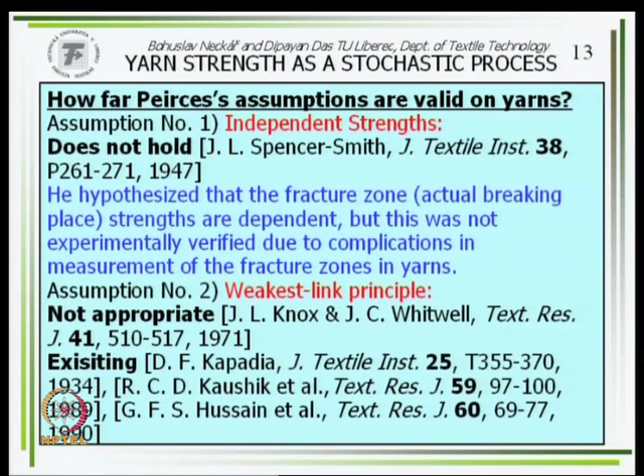Based on what is Peirce's differences? It is point one - point one means independent strengths. No, they are not independent. So it was necessary to create some more general model in which, among the short fiber portions, among the strands of short fiber portions, there was some dependency.

Let's imagine a yarn symbolically divided into some portions of length L0. The distance from here is 1 times L0, 2 times L0, 3 times L0, i minus 1 times L0, and so on.

Each portion, each segment, has its own strength S1, S2, S3. So we obtain some series of quantities S1, S2, S3, Sk, and so on.

What is the strength of some fiber length in which are the segments from the ith segment to i plus k? Let's imagine some length in which there are k plus 1 segments, from subscript i, to j equals 0, j equals 0 to j equals k.

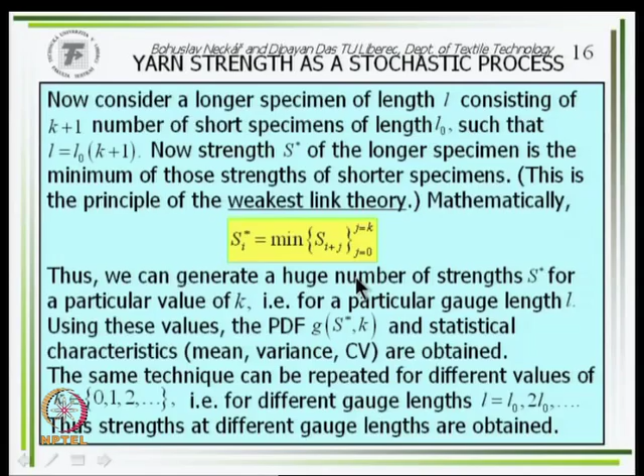The experimental work we did was as follows. The table illustrates experimental values. We had some instrument which helped us use a 5 centimeter gauge length, L0 equal 5 centimeters, and we measured strength.

Then we evaluated how the strength of longer lengths behaves, because we had this smaller measurement. We obtained this experimentally - immediately measured from different gauge lengths on the breaking machine.

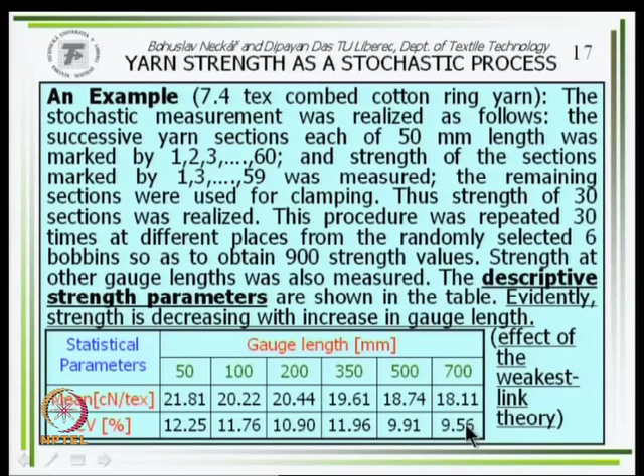You can see how is the distribution by 50 millimeter, by 500 and by 700 millimeter. It was same yarn, but different know-how for measurement: one time it was 5 centimeter gauge length, then 500, then 700. Can you see this histogram?

How is it going from the left-hand side? This histogram is recalculated to the standardized values. So you can see this linear transformation, it is going more to the left-hand side, in opposite to this Gaussian standard.

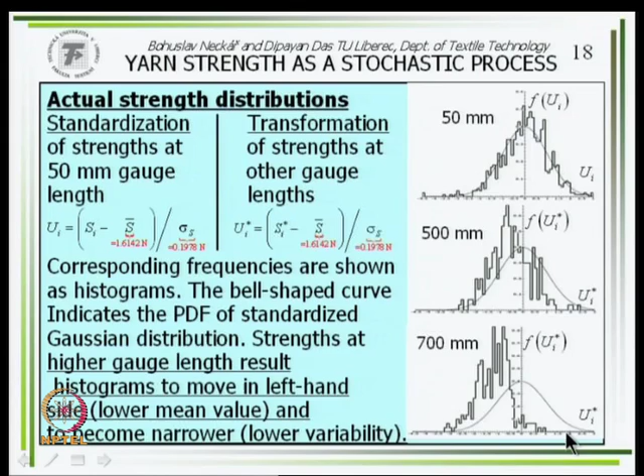Probability density function, Gauss - the idea of a Gaussian distribution in short lengths, in this case 5 centimeter lengths, is relatively good, as shown in this example. It is the same yarn, and a quantile plot.

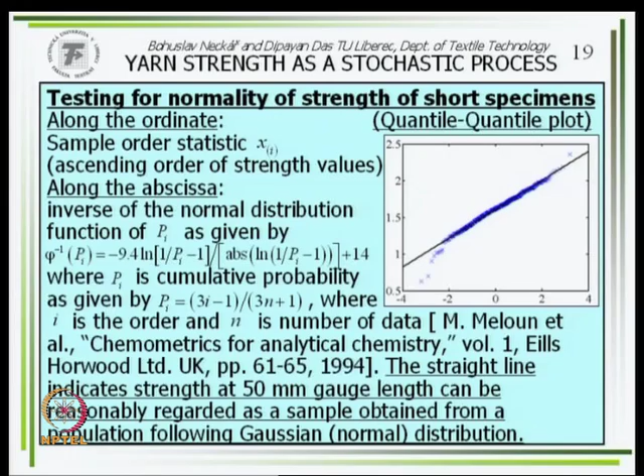Maybe you know what it is. There's some graphical system through which you can watch if this or that distribution is or is not enough Gaussian. You can see that the dominant part of points are lying on a straight line, which tells us that this distribution is practically very good, compatible with Gaussian distribution. So the idea of Gaussian distribution can be.

But how is it with dependency and independency? We use the so-called autocorrelation function. Do you know what is it, the autocorrelation function? Maybe you know what is it, the coefficient of correlation. You know it, yeah? Good.

Let's imagine our yarn. We measure - let's imagine theoretically we have the set of quantities S1, S2, S3. We can create some couples: S1 and S2, second couple S2 and S3, third couple S3 and S4, and so on. Every time this couple of quantities represents two parts in which the distance is 1 times L0.

Well, and from these couples we can evaluate a coefficient of correlation. Is it possible? Yes. We evaluate it and we say, yes, this is the coefficient of correlation for the distance of these couples of strengths 1 times L0.

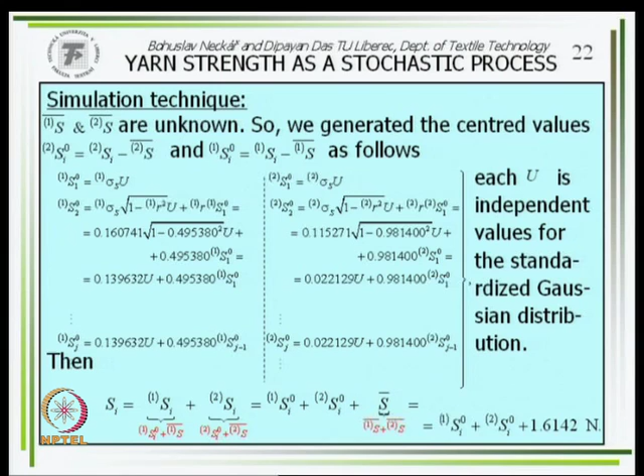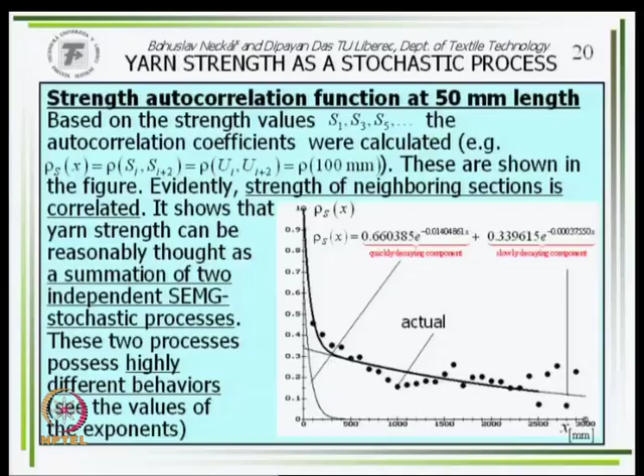Based on evaluation of such an experimental curve, we obtained parameters through which it is possible to calculate all other equations, and finally the probability density function, or standardized version, for different gauge lengths. We use the simulation method, because the analytical version is very, very difficult. We simulate the strengths S1, S2, S3 using a computer. We give the computer the corresponding equations and parameters, and it produces strengths with the same distribution as in the original yarn. Then we can evaluate the strength distribution for longer lengths.

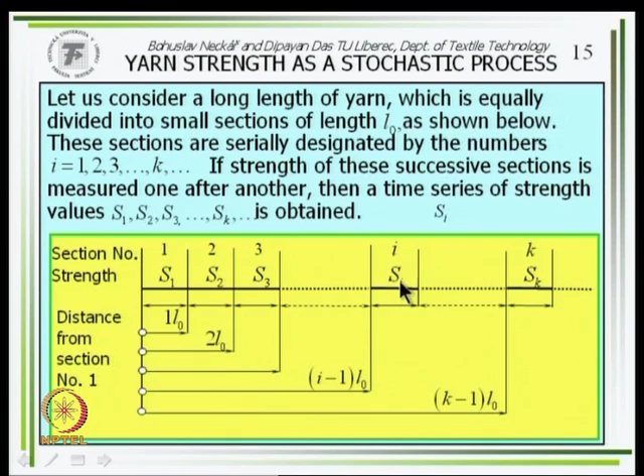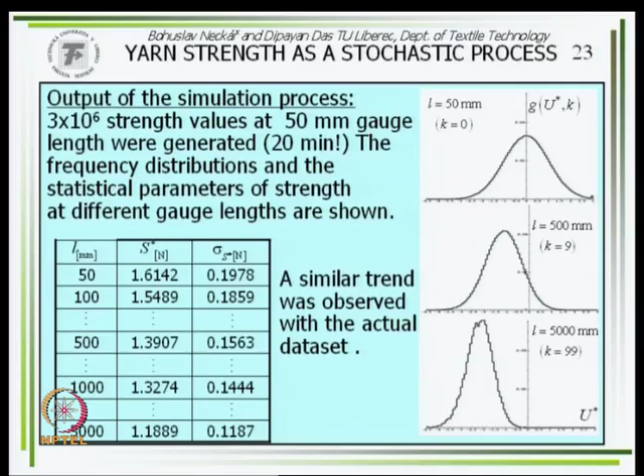And now how is it when we have this set of values, a set of values obtained from the computer using this simulation, a set of simulated values? We can evaluate it from this set the same way as in the laboratory: mean value, standard deviation, coefficient of variation, and the standard statistical characteristics.

And when we had this, we tried to apply a similar equation to Mr. Peirce's, and we obtained the following expressions. They are based on our experiences for cotton yarn. They are good; we can use them. Nevertheless, the exponent here is now 1 by 5, then 1 by 9.3, and this coefficient is 5.3 and was 4.2. Peirce derived it for his model of independent yarn portions. Now it is for dependent ones. We call it SEMG, a stationary ergodic Markovian and Gaussian process, so that we obtain other parameters which can approximate the resulting values, like here.

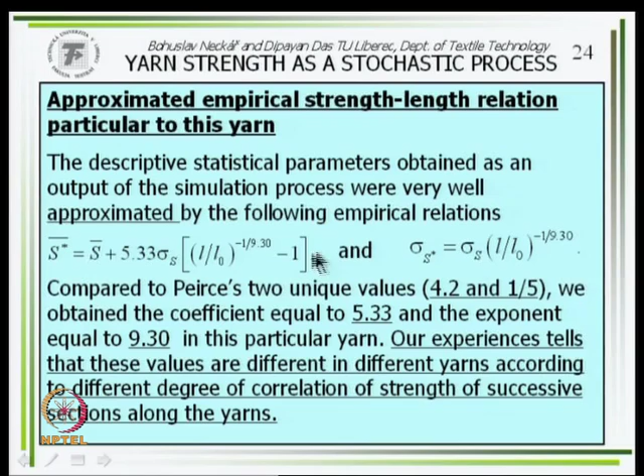What's interesting? Professor Žurek, a very known name in the theory of yarn, now a very old man in Poland, in the town of Łódź, at the University of Łódź, measured this problem too, and he derived empirically this exponent as 1 by 7. Based on our experiences, we have 1 by 9, but it is evident that reality has a higher value when we approximate it through this equation. Reality needs a higher exponent than Peirce's exponent, 1 by 5, derived only theoretically.

A small story. When Professor Žurek was 70, maybe 75, there was an international conference in Łódź, and I presented a contribution on why Žurek's value 1 by 7 is better than Peirce's earlier number 1 by 5, because this theory says it theoretically.

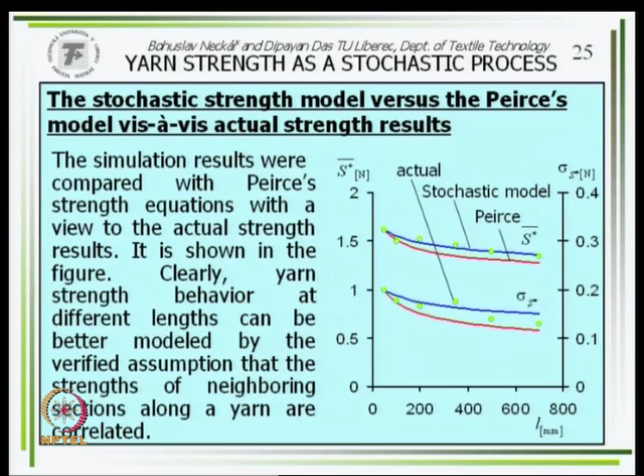So this is a short overview, nothing more, of this model of yarn strength as a stationary ergodic Markovian and Gaussian process, which we call the SEMG process, which brings slightly better results. Nevertheless, the full derivation is relatively long and needs a not easy method. Therefore, when such a problem becomes actual for somebody of you, I recommend you call or invite Dr. Dipayan Das from IITD and ask him, because he has worked for 3 years on this theoretical as well as experimental concept, and he is very well informed in every detail.

Well, and this is all for the problem of yarn strength, and for all the textile questions which my set of lectures was about.